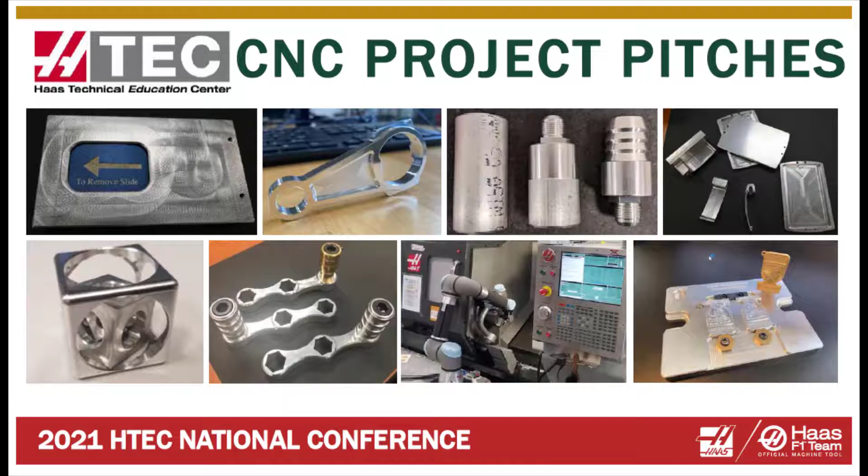This year, the HTEC Council has created a brand new CNC project session. Since we're virtual, we've converted our poster project session into a virtual elevator pitch project session. So join me over the next 35 minutes in watching 9 different projects that our CNC educators from around the country have submitted to showcase to you. Now, the cool part is everybody who's submitted a project is willing to share their material with you if you would like to use a part of the project in your classes on teaching Haas CNC machining.

So the format of this is random order. I pretty much took all 9 videos and inserted them in random order. At the beginning of every presentation, there's going to be a title and who's actually presenting. The educators have been asked to provide their contact information at the end of their presentation so you can contact them if you're interested in learning more about their projects. So let's check out these 9 exciting projects. Here we go.

Hi, my name is Antonio Espinoza, and I'm going to talk to you about the speed handles that we did on the CNC mill. These handles are used for a vise, either on a manual or on a CNC mill. The software we used for this was Fusion 360. This was my first time using this software, but my professor provided us with YouTube videos on how to make basic drawings or basic dimensions, and this wasn't that hard.

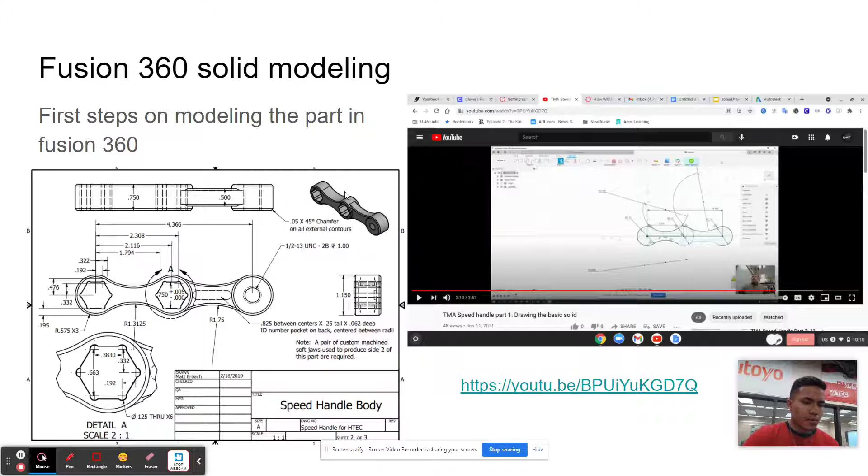So we each had different tool paths, meaning that we each had a different start and a different finish in order for us to have a different and unique code. For example, I could have started making my holes first on my part. Someone else could have started shaving off excess material.

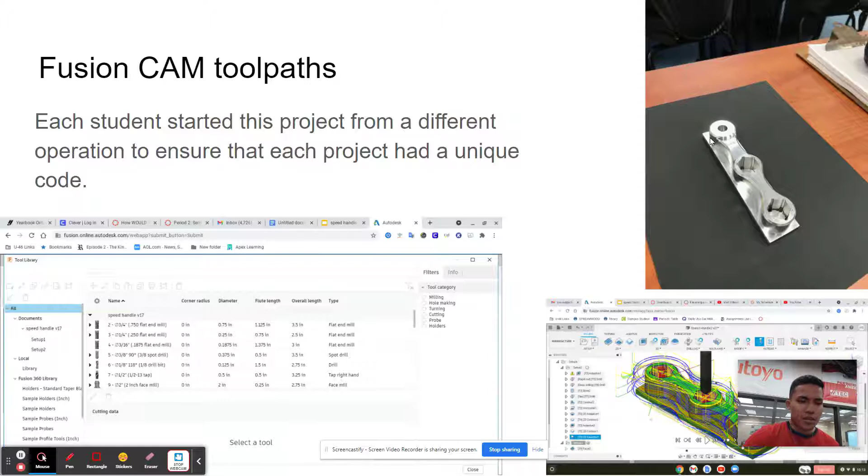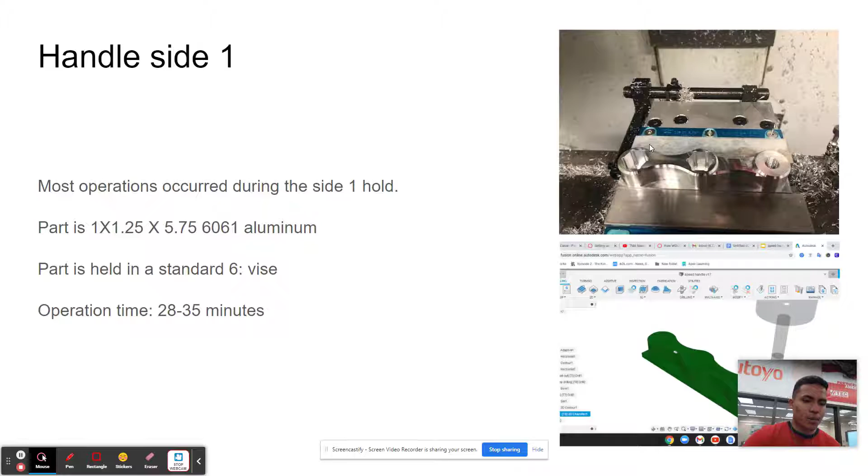So for handle side one, we took off most of the material in one shot, holding on by the vise. Usually it took us about half an hour to get the side done. For side two, we had the part flipped and it was held by these soft jaws, which were made by the first 2 people that finished the project. This only took about 7 minutes because it was just facing down the excess material at the bottom of the part.

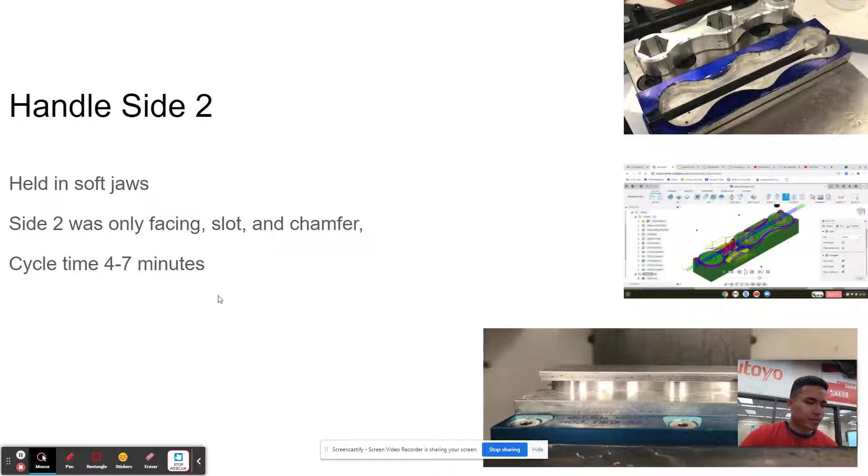Hi, my name is Michael Grader. I also helped with the project. We used all 4 tool slots on the CNC machine to help make some CNC cranks. This is a crank I designed in Fusion for how we made things. This is just the basic crank for competition and all that we use.

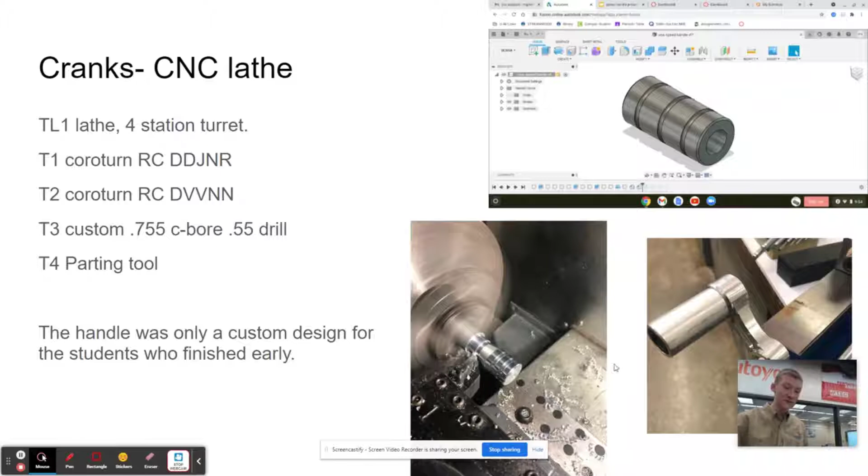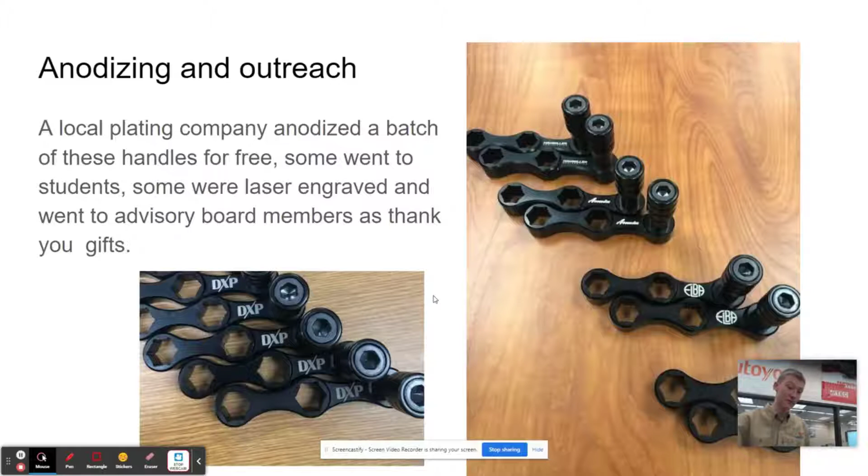We then anodized some of these cranks and handed them out to our advisory board members as a thank you, because some companies help supply us for the school. We used a bunch of materials for the tool slots in the CNC machine that we changed. We used screws, hex keys, tightening and all that.

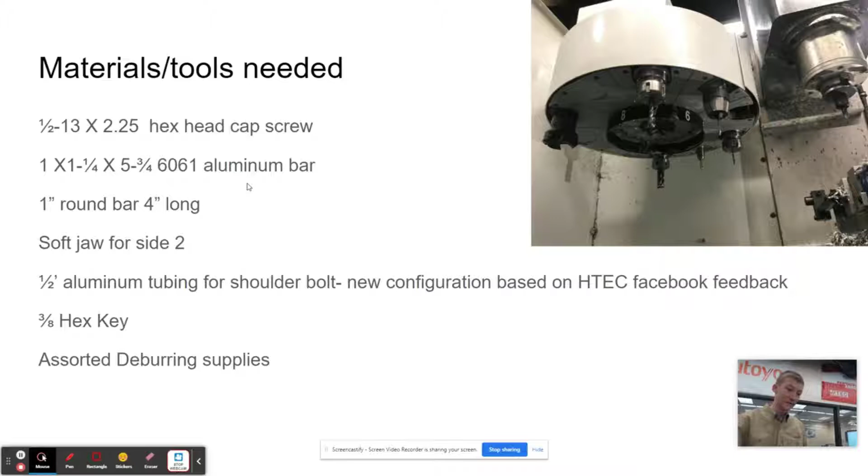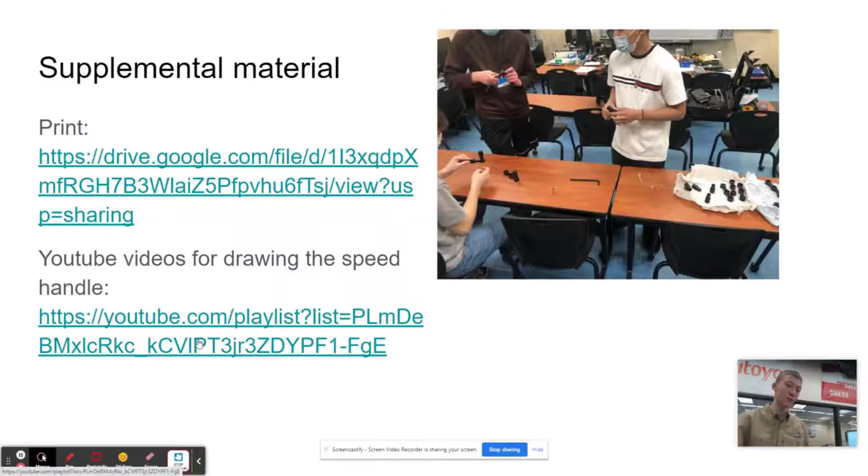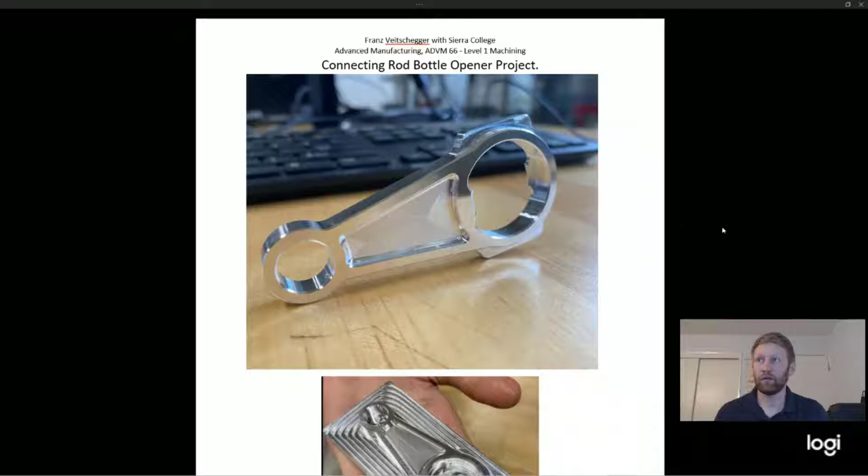Hello, my name is Franz Veitschegger. I'm with Sierra College in Rocklin, California. This is Advanced Manufacturing, Machining Level 1. There are no prereqs for this class. This is my connecting rod bottle opener project. This is the finished project, and let's hop into it.

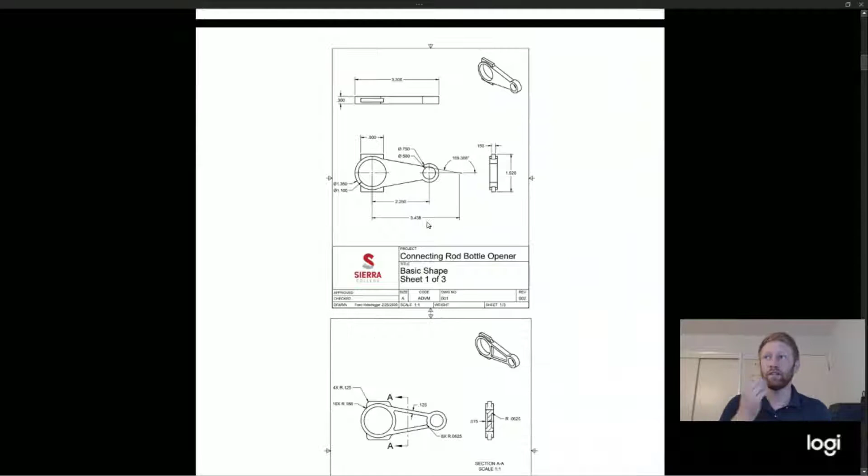So this is my lab at Sierra College. We have 9 Haas VF1s, very fortunate. I provide the students prints. The print is broken down into 3 prints to make it a little bit easier for these entry-level students to understand what is going on. With each print, I also provide a screencast video link. It goes through, I reference my prints, and then I show them how to model it inside of Fusion to help them when they are not in the classroom. And this is just a link to the screencast video.

This is the modeled connecting rod. This is a CAD inside of Fusion. Again, it's entry level, so I kind of spoon feed them how to set this up in CAM. So I created all these instructions in Word docs. I did all screenshots of how to create it, and examples of the tool path after you've completed it.

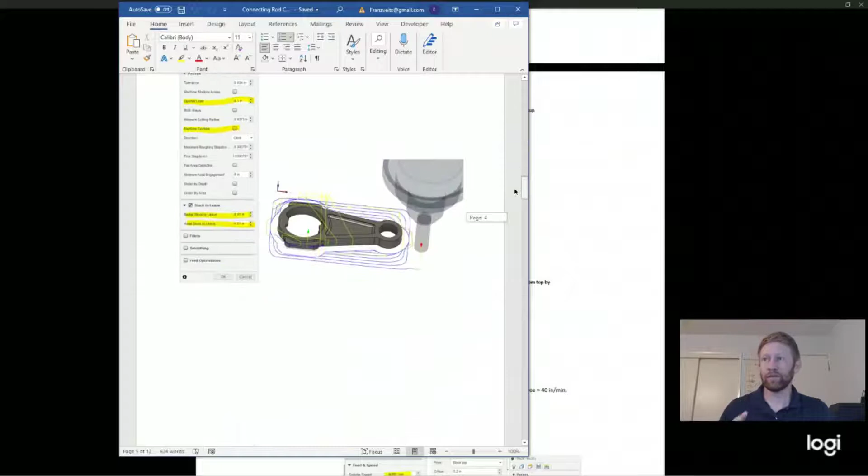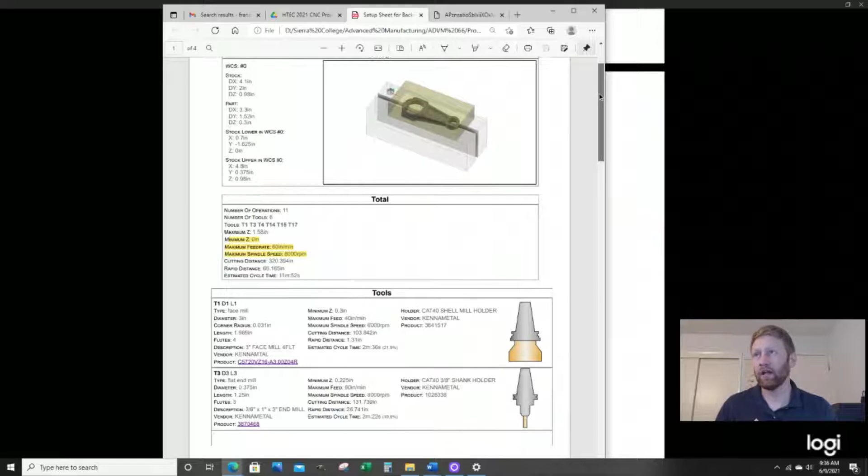And my saving grace in this class is after they've completed the tool path, I have them create a setup sheet again in Fusion 360. In this setup sheet, I have the important parameters. So Z minimum, max RPM, max feed rate, which has just saved me a ton. And so the students will go through and they'll verify operation by operation to my master copy, which is what you see right here. And if there's any problems, they bring it to class and we fix it in class. So here we go. Let's go.

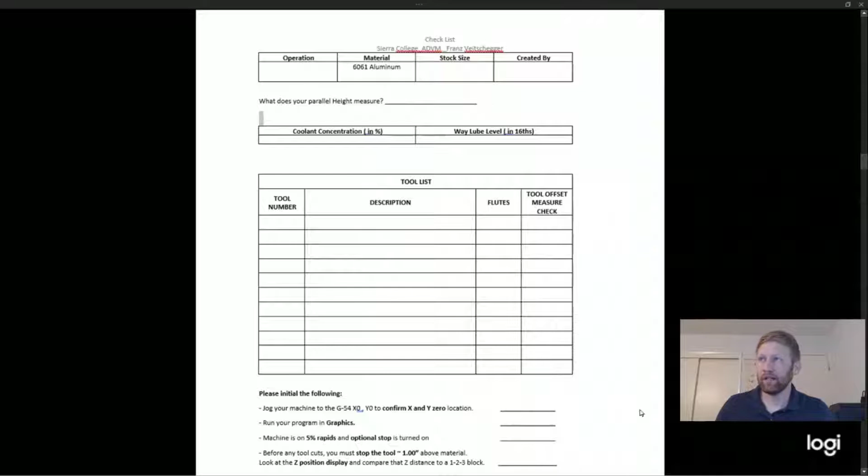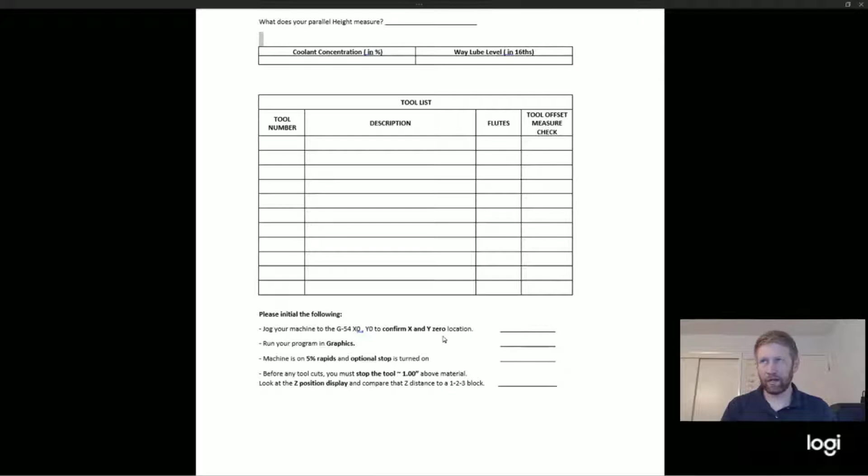So before they run the machine, I have these checklists, and so they even look at the coolant concentration, way lube level. They got to check their stock size, write down their tool numbers, do a quick description, verify their XY location, 5%, coolant off, let the cutter engage in the material before they let the coolant rip so they can make sure they're in the right location.

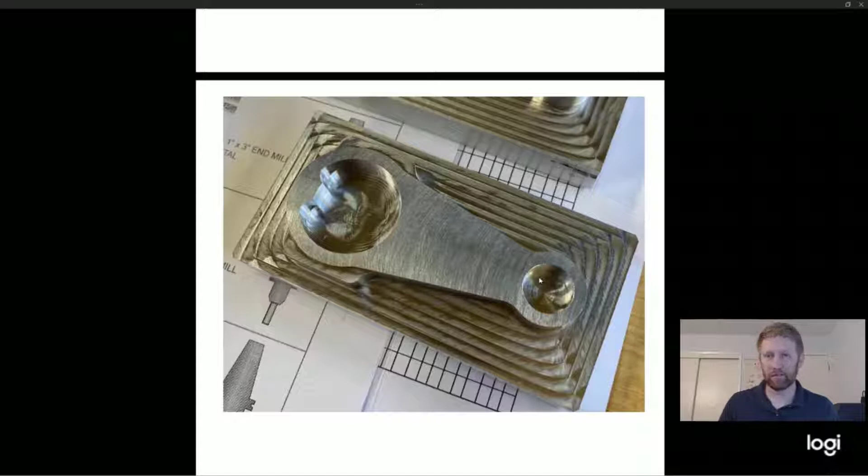This is roughed out. This is the very first one. So they first use that corner, and then, oopsie, we machined that corner away. So then we come back to class and lab the next week. The only finished part was that bore. So then we got to figure out, we got to use our mechanical edge finder, locate that bore, or an indicator, locate that bore, move our WCS inside Fusion, and then finish the detail inside of here. So that's real neat. Here we go.

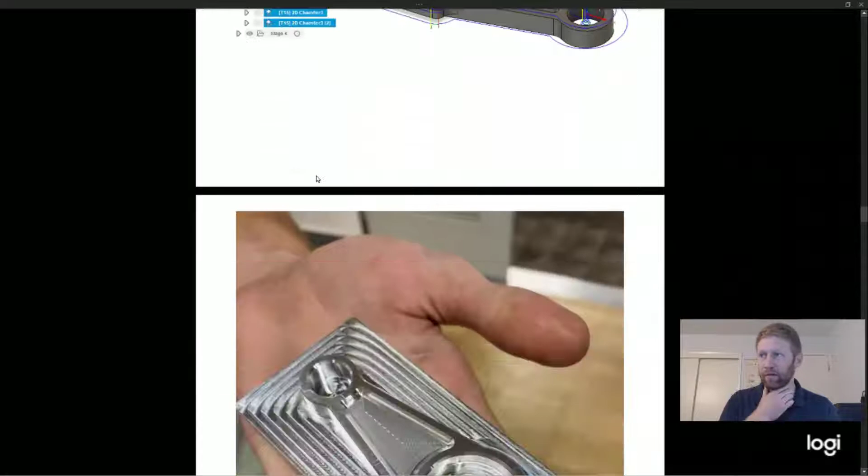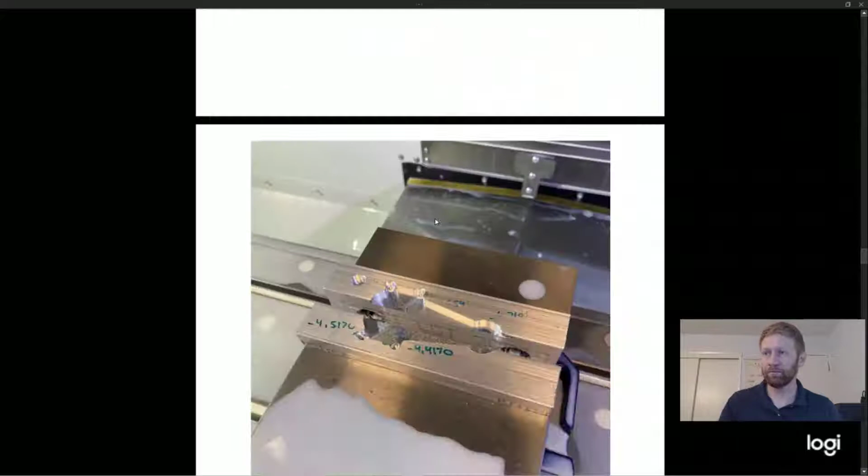That's just inside Fusion, the CAM environment, tool paths. They post the tool paths they want to post. This is the finished top side of one. So then how the heck do we machine the back side of this thing? Because we have a square and we have this weird shape. So we show them how to, inside Fusion, create soft jaws using the part geometry to project onto the soft jaws, cut, create them, machine them. We use these as our multi-use soft jaws. These are machined in class, students, I mean, there we go.

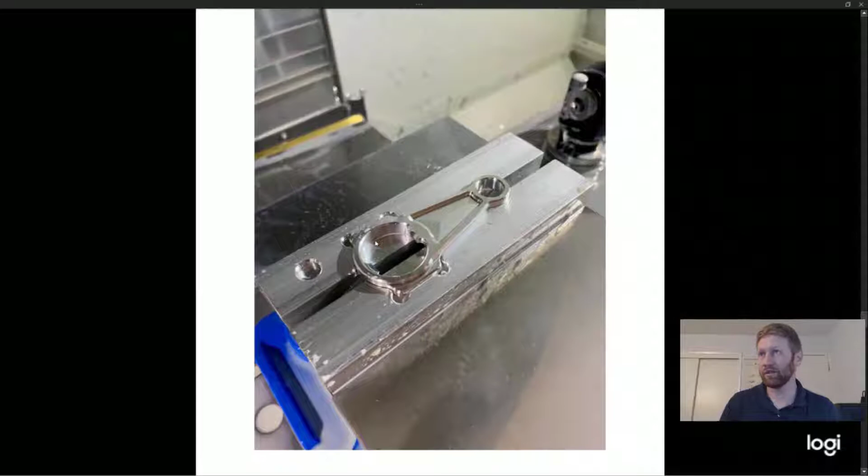So we also model it, use the joints, put them together. Our known location is right here. So we touch off there. Our Z is the bottom of the pocket. This is a finished part from a student. Again, all these are student parts. Student part, oh wait, we're not done.

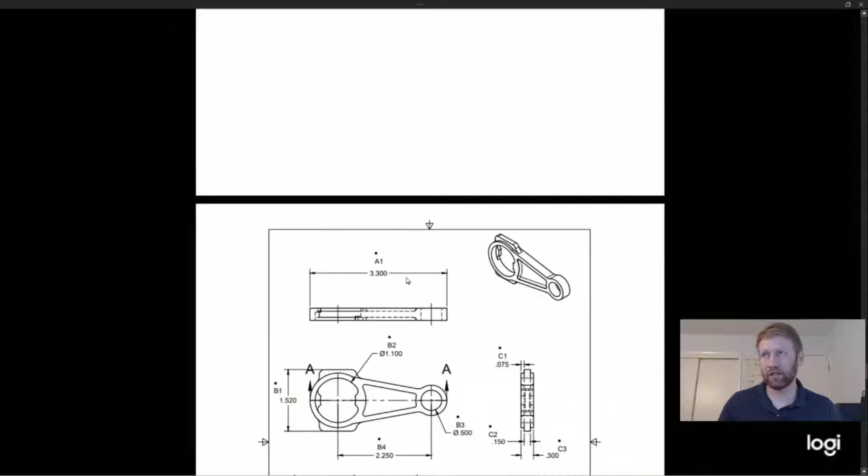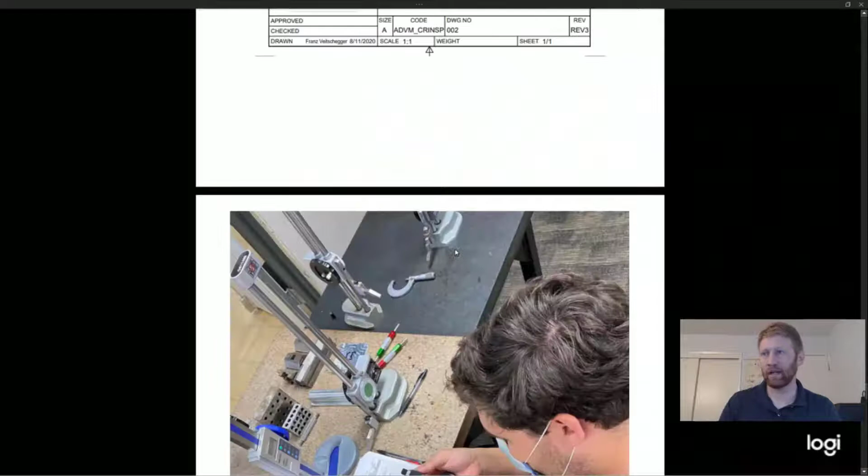We have inspection. So at the end, I have a Form 3. I created this document. I have these reference numbers, a characteristics number, and they measure them. And I kind of tell them what tooling or instruments to use, height gauge, mics, gauge blocks, gauge pins. And they go through, they inspect the part, they see how good or bad they are, and it's an awesome project. Students really like it. They can connect from what they're doing in class to the real world because they walk away with this little kind of a keychain bottle opener.

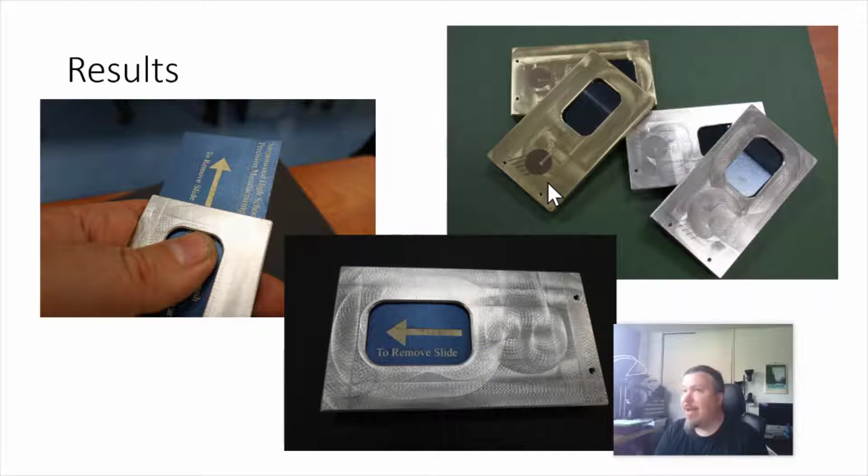We did actually in 2018 hand off some of these with the Gene Haas Foundation logos to the Haas Foundation just as a thank you, because they got our back. We might as well give them some neat stuff when we make it. We started this in 2018, carried it over to 19, and then 2020 we were supposed to do it, but obviously COVID got in the way.

Village of Streamwood runs this, and basically the idea is we take over the whole shop, we run all the equipment, and try to do a production run of something. Most students only do individual projects, so it's kind of fun to get them to think outside the box a little bit when we have to consider making many of something.

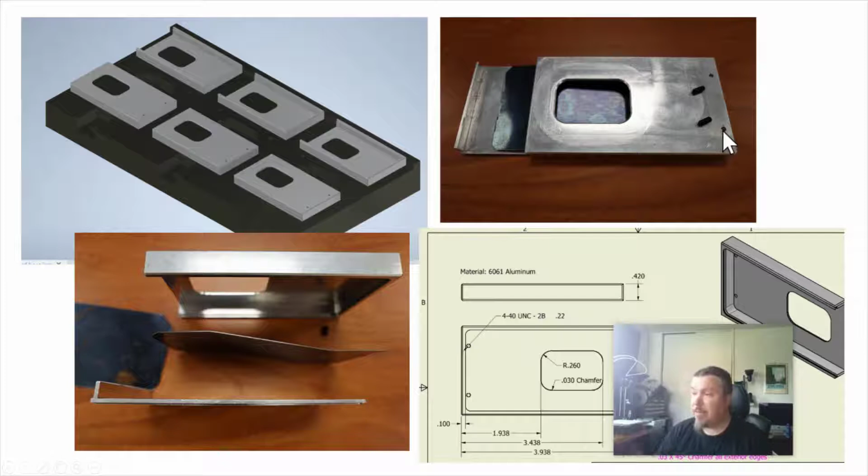There's 3 parts. 2 of them are billet aluminum, and then there's a piece of spring steel that gets just a simple shape applied to it, and then 2 screws go through there, obviously through these holes, and pinch the whole thing together, hold it in place. Pretty simple, pretty elegant. It actually works quite well.

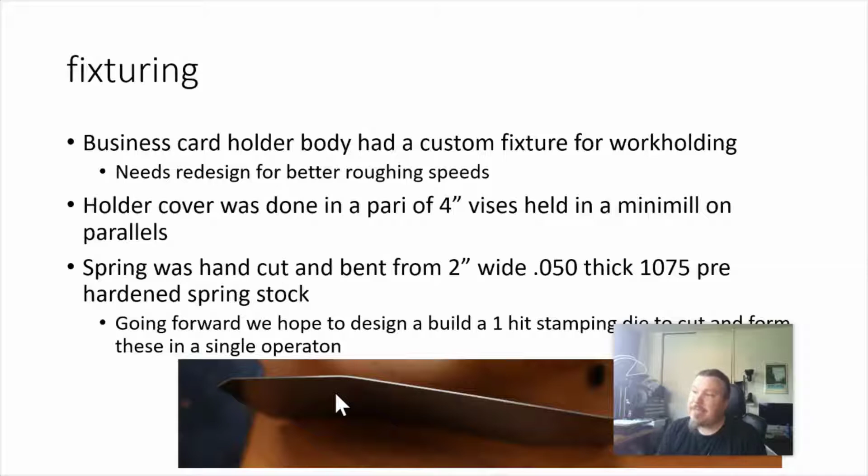The fixturing, it was all multi, all like Mitee-Bite type fixtures. You've got the spring here. We're hoping to, as part of process improvement, create a one-hit stamping die so that we can actually just make these things in an automated capacity instead of shaping them by hand.

And then it's also our hope to possibly anodize these so that when we do the laser engraving, obviously it pops a little bit better. And then there's Real World Scholars and Harbor Freight Ed Corp, and we're looking to maybe tie in with those and maybe sell some as well. None of this is official. Obviously, we need to get back in the swing of live students before we can take on this project again.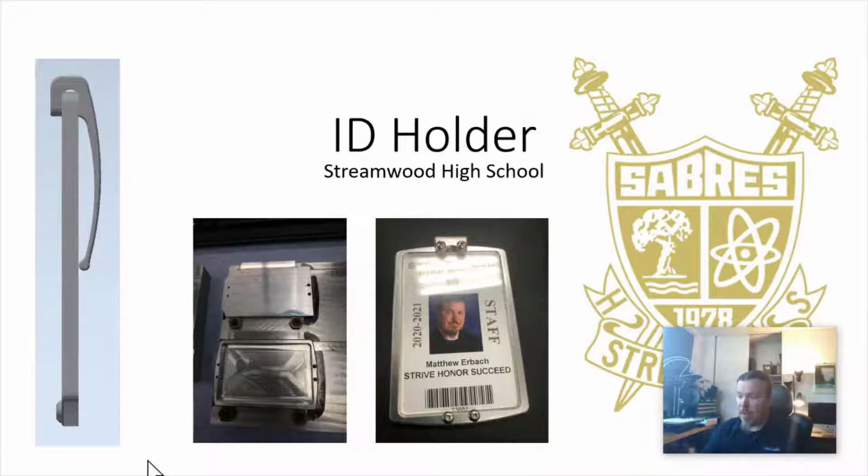Morning, ladies and gentlemen. My name is Matt Erbach. I'm presenting the Streamwood High School ID holder. The idea is pretty simple. We incorporated this idea in the senior class, designing the tooling, the fixturing, the processes, the CAD, the CAM, and it's intended to be used in the lowest level students, so my freshmen and my sophomores.

The idea is it's a turnkey, ready platform so that the students won't have to get into the specifics of like touching off tools. They can do this very, very early in their school experience, so they might not have a lot of skills yet as a freshman, but they can still hit the cycle start and monitor a job and load and unload and things like that, and produce something that looks pretty good that will serve two purposes.

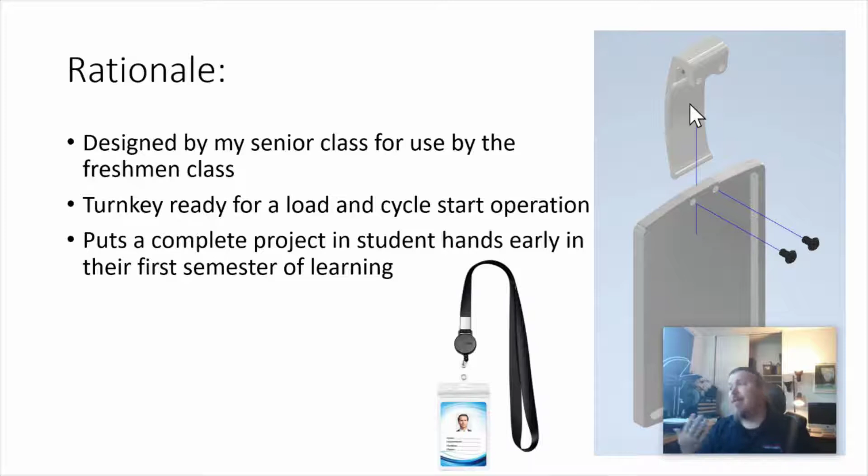Number one, it'll help promote the program, and number two, everyone in my school is required to wear their ID on them at all times. So they've got these typical traditional lanyards with the ID hanging underneath, and they're a huge safety hazard in the shop. So the advantage with this being equipped with a belt clip means that the students can clip it to like the pocket of their jeans, and they're still meeting the district expectation of wearing their ID, but it's not around their neck where they're potentially going to hazard themselves.

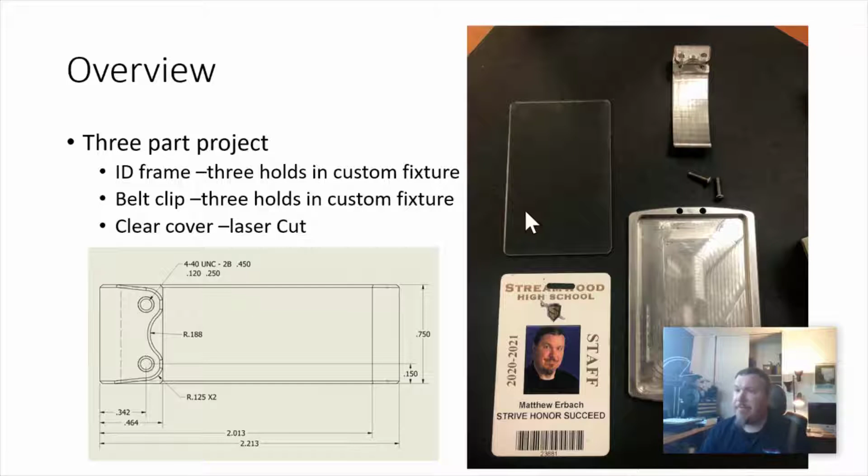Three parts. You got the clip here, and you've got the body of the ID holder, some screws, and then the acrylic needs to be either laser cut or run on like a table saw, and then just corners radiused to fit, filleted to fit. So I did this with my seniors, and they did the tooling, the CAD, the CAM, pretty much as we could possibly arrange. So you can see here that what we've got is multiple holds.

Hold one is up here. I didn't have much room for it. Takes a 3-inch bar down to size on the edges and does as much of the drilling and tapping ops as you can. Hold 2 obviously locates on a couple of fixtures here, little Mitee-Bite holders here, and that gives you all your corners rounded down and your big internal pocket done. And then hold 3 is just essentially a backside chamfer.

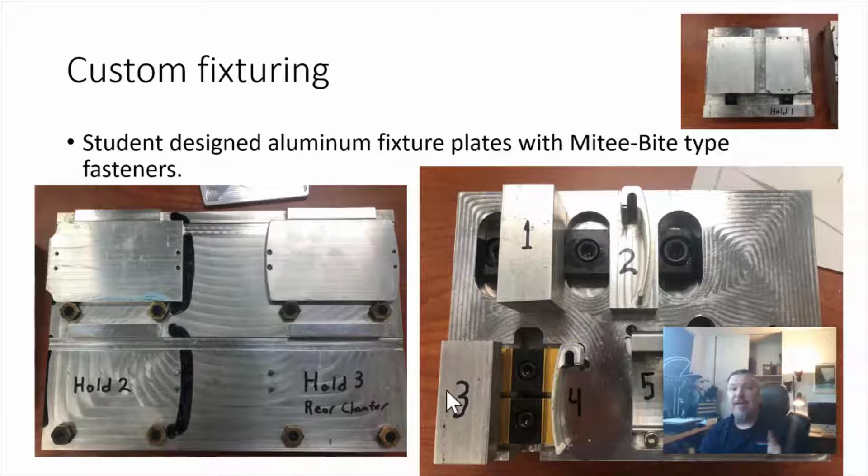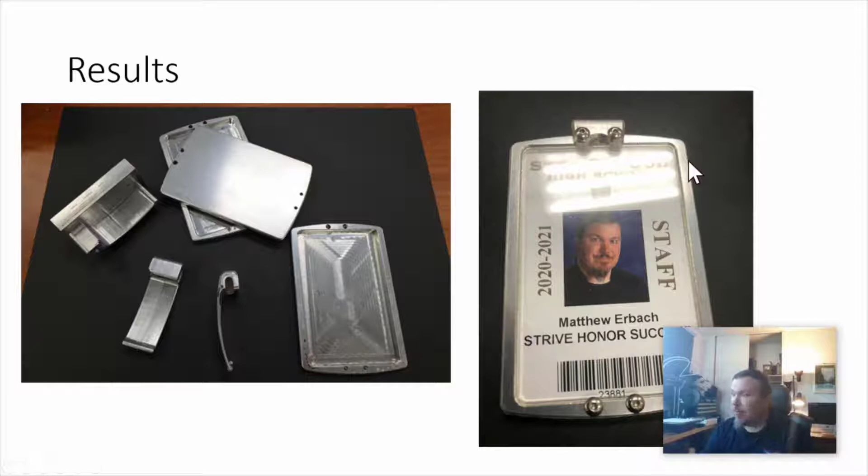And then you can see here we've got a similar multi-stage process. You'll notice that everything's going in pairs. It's going in pairs because I want the student to produce one for themselves, and then I get one as well to hand out to a staffer at the end of this. You can see here the results. Obviously, this is a completed ID holder. My apologies, that was the only photo I had available. But you can see some of the parts here the students have produced.

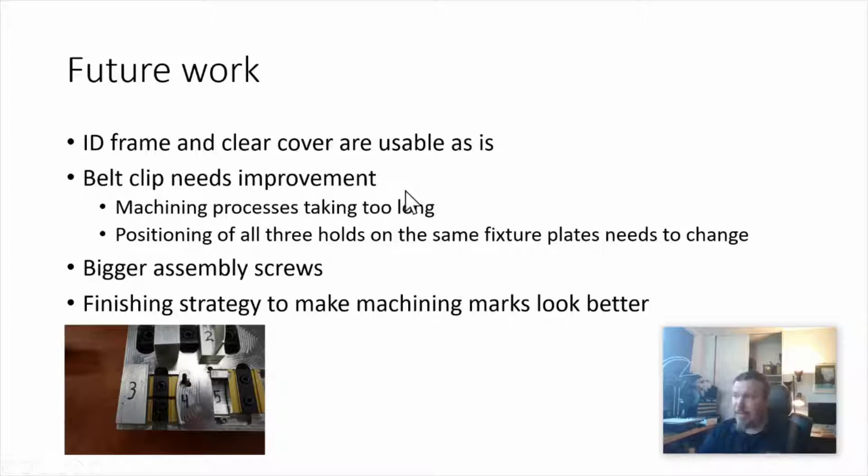Your materials list. Future work. The assembly screws are currently 4-40s. I want to go bigger. I want to tweak the belt clip a little bit. It's not quite as good as it should be. It's a little bit too rigid, so it's very difficult to clip into your pants. And that's basically what's got going on.

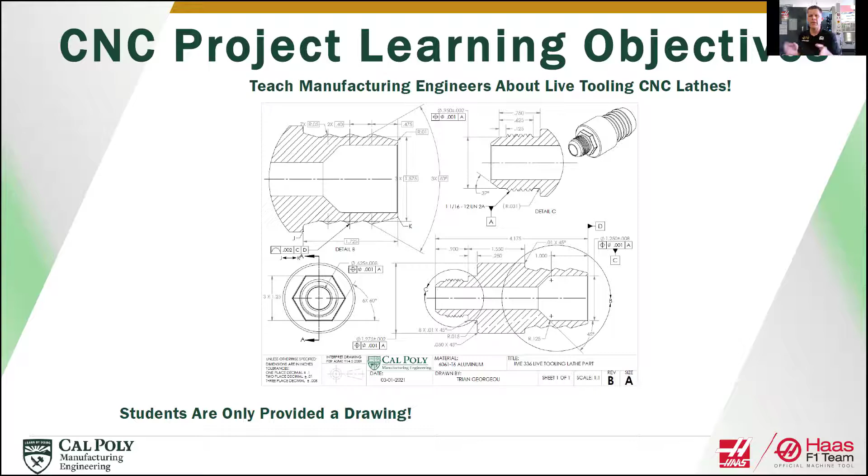Now, the other side has an AN fitting and a large bore where the students are basically learning how to use boring bars for the first time in this project. Now the students are only given this engineering drawing like you see right here. From that engineering drawing, they have to figure out how they're going to produce that part through all the different operations. They have to figure out how they go from raw stock to finished part.

So as a class, we do some production planning, and we come up with a stock size of like 2 inch by 4 1/4. We figure out how we're going to hold it. So in this case, we're using a 1.975 bore soft jaw that's 1.375 deep, and it holds both operations in that same soft jaw, as you can see right there.

So for that first CNC operation, they used Fusion 360 in this project. They used both Mastercam and Fusion 360 in this course. So this one was a Fusion 360 project where they machined that -12 AN fitting all the way up to the back of that 1.975 diameter. So they learned facing, turning, threading, spot drilling, and axial live tooling.

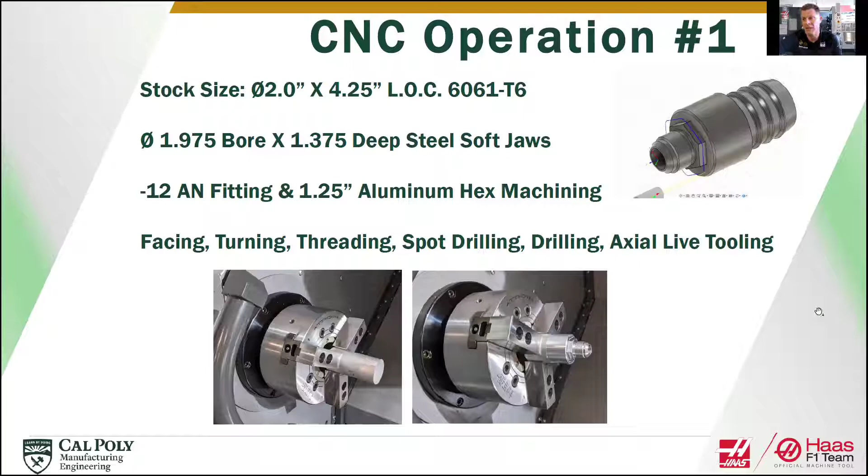And we ended up chamfering that part with a 3/8 inch bull nose end mill, and did a little 3-axis machining. Now, thanks to Tim Paul from Autodesk for coming up with that idea.

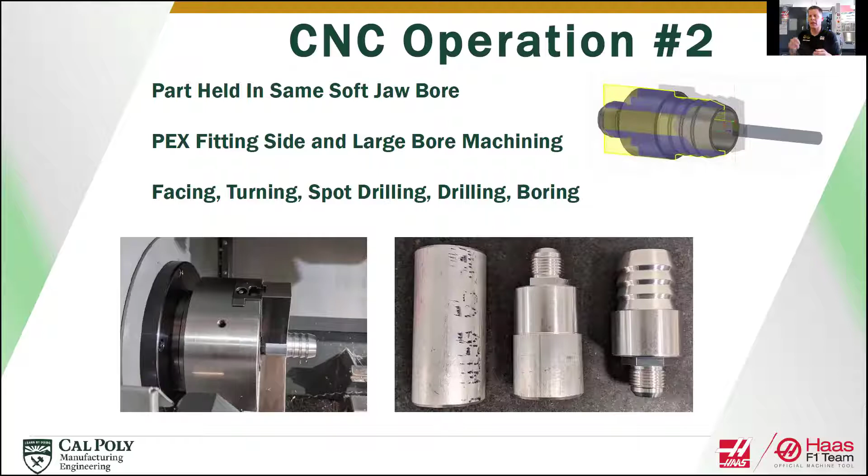Now, the part is going to be held in the same soft jaw bore for the second operation. So they machine that PEX fitting side, and then they do the large bore machining for that second operation. And so they're facing, turning, spot drilling, and boring. The reason we had to drill twice is we don't have enough Z right there. We had to get a stub drill.

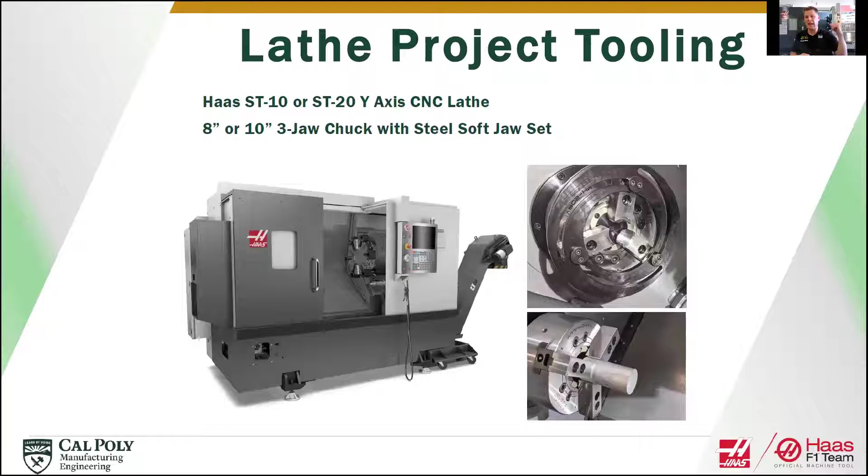So to machine this part, we needed a soft jaw set. It can be done in an 8-inch or 10-inch 3-jaw chuck. Mine actually happens to be a 10-inch 3-jaw chuck. So I have an ST20Y with the BMT turret right here. So you can see that behind me.

And in terms of cutting tools for this project, you can get it done with a CNMG, a VNMG, and then some sort of OD threading tool to do that 1 1/16 inch -12 thread. You need a 3/4 inch, 120-degree spot drill, a high-speed steel 5/8 inch stub drill, a small boring bar, and a 3/8 inch bull end mill with a 15 thou radius.

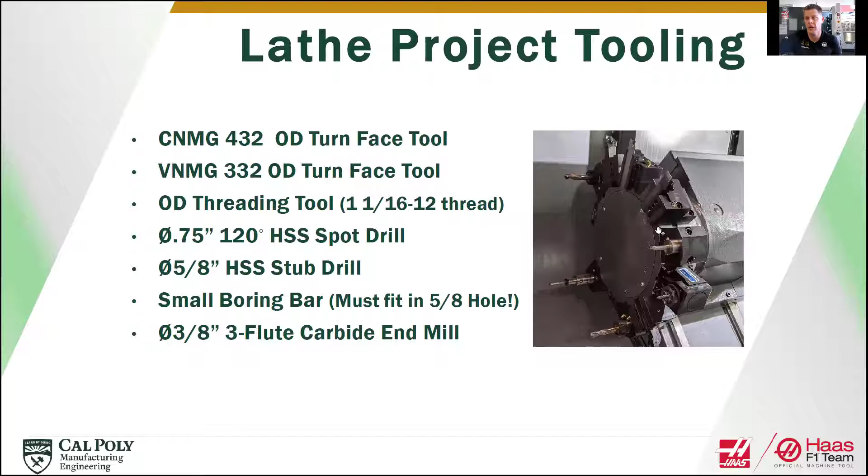Now, the students go from solid model to finished part just from an engineering drawing. And at the end, they use the metrology lab to validate their process. So they measure the part using the optical comparator to validate that they machined that PEX fitting correctly.

The Turner's Cube project has been around for a long time. We're using a 5-axis. We're doing this with 3+2 machining, manual G and M coding, speeds, and canned cycles, of course, multi-fixture offsets, subroutines, and CAD/CAM programming. We're actually doing the project twice. On the first project we do 2 orders of operations. We cut 5 sides in the first op and then finish the sixth side on op 2.

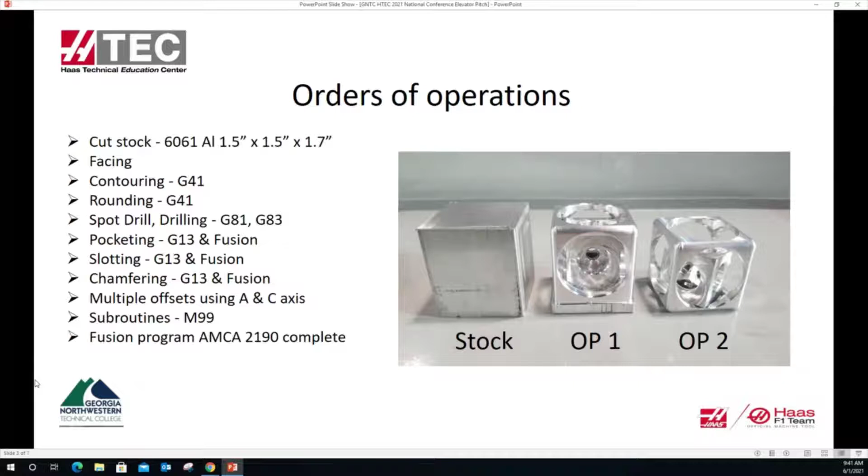With all the parts and pieces there, we manually G-code for cutter comps and rounding and some of the other parts of the project, and later go back and program it complete with Fusion. Students will learn a lot of other things in there, subroutines and manipulating the code and that sort of thing. On op 1, they get a drawing like so, and they will actually generate this drawing in class. So finish top 5 sides complete, you see that?

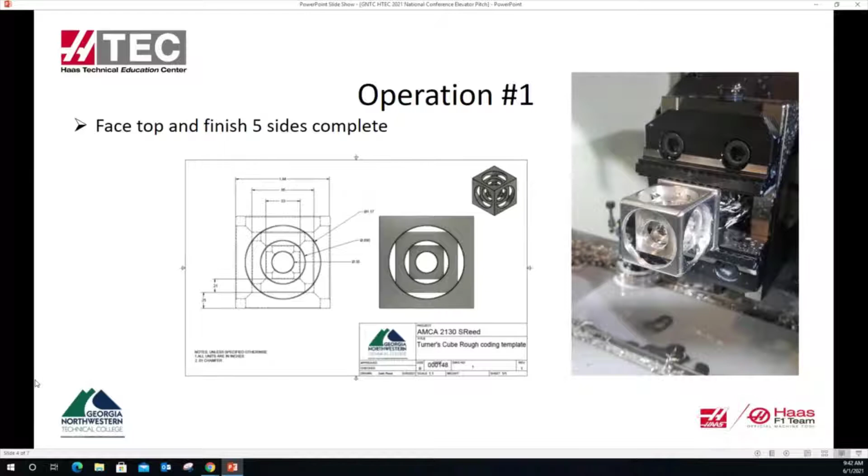That's as it's finished using A and C axis, and then on operation 2, they'll finish the 6th side, and you'll have to use spacers in this, and we'll show you right here the total machine time not to exceed 16 minutes and 45 seconds. So obviously speeds and feeds are important, and not forgetting anything, of course.

We also do something different. We use a small Woodruff key cutter, slot cutter, to cut the corners and relieve the corners, so that when we cut the block on the 6th side, the last op, the cubes will all be free when they leave. That's why we need the spacers to keep them from bouncing around.

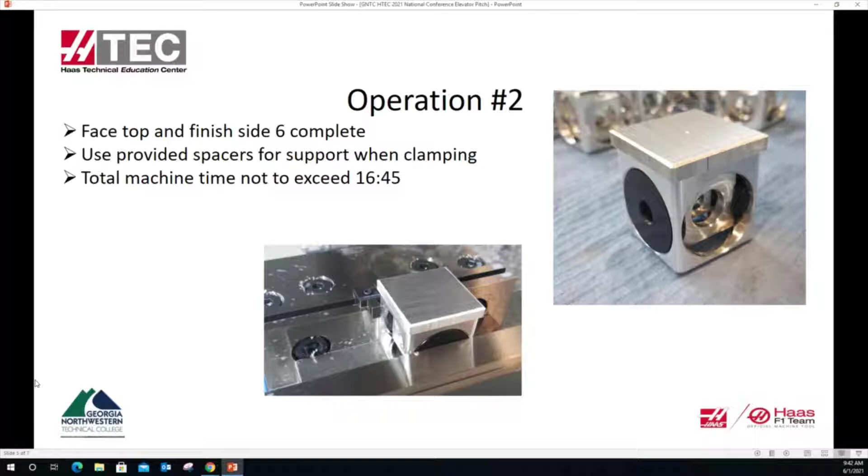And if you don't use the spacer, Mr. Bill says, I won't do it. But if you get this joke, you're probably old.

So anyway, there's the finished cube.

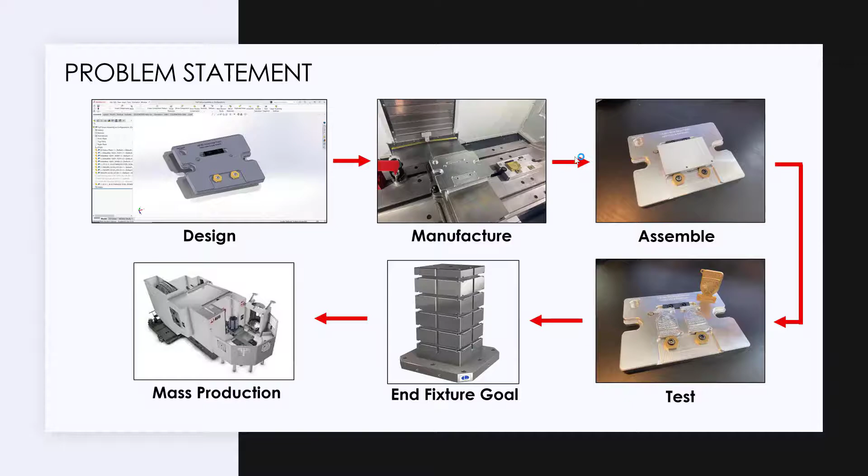The overall goal is to multiply this fixture and scale up mass production of many keychain parts on multiple tombstones in the pallet pool of the horizontal mill. Design constraints and criteria for this fixture design consist of a few main things. If achieved at a minimum and ideally exceeded, the design of the fixture should be successful. This includes producing 2 finished keychain parts and the clamping forces of the fixture withstanding the tooling forces with a minimum safety factor of 2.0.

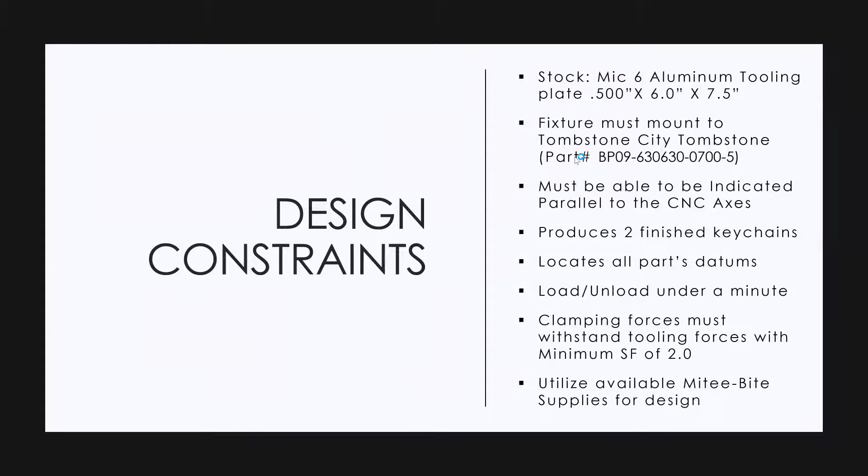To meet the design constraints mentioned by Adam, we locate our part face down on the tooling plate, butted up against a 2-inch Mitee-Bite locating rail, and lastly pressed to a 0.375-inch dowel pin. The part is securely clamped against the B datum with 2 800-pound Mitee-Bite clamps, which are centered on the individual keychains. A WCS bore is in the top left to be conveniently probed, and a 0.25-inch poka-yoke dowel pin was added to prevent improper loading.

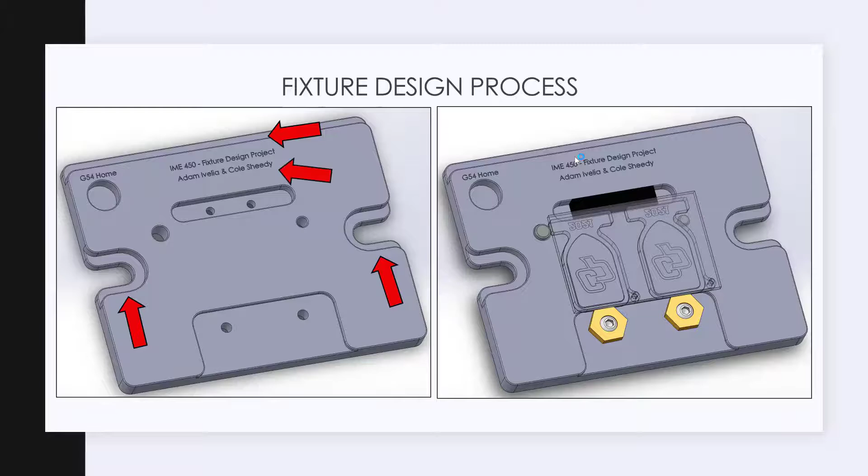The last features present are a square indicating band, 2 T-bracket bolt holes with excessive counterbore relief to mount the fixture, some cosmetic engraving, and chamfering for comfort.

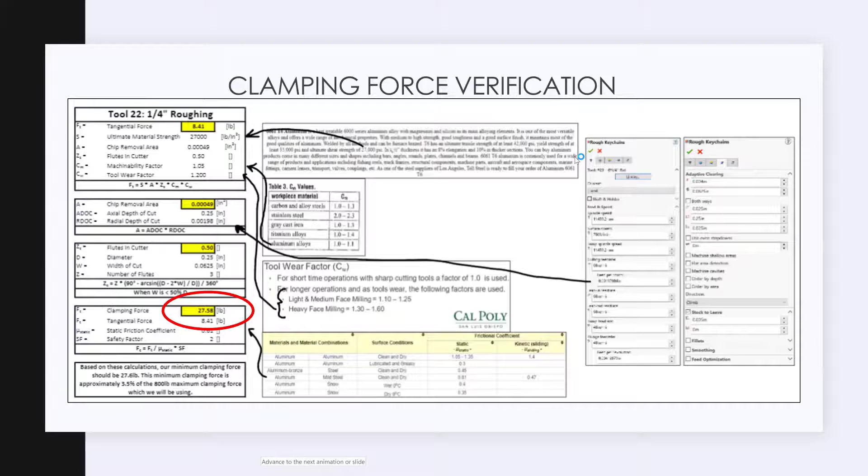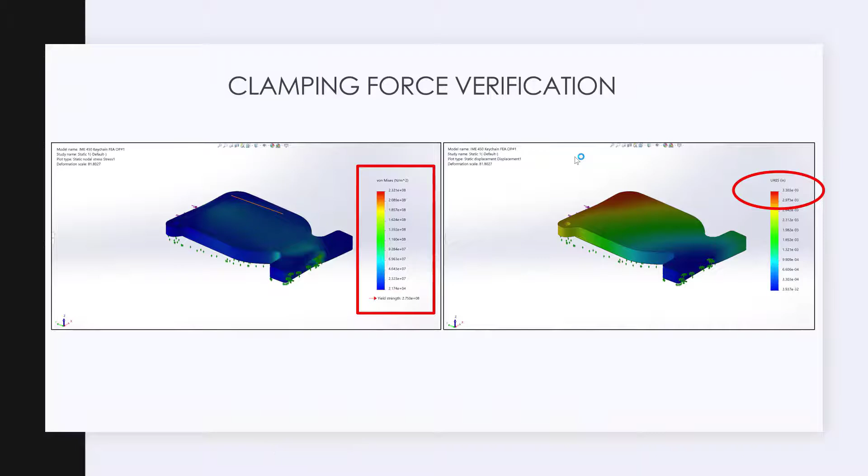To ensure our keychain parts would not throw during milling, we found that we needed a minimum of 28 pounds of clamping force when roughing with the 1/4-inch end mill and 40 pounds during the face milling operation. To verify our keychains would not deform, we conducted a finite element analysis to find an approximate deformation of 3 thou at the 800-pound maximum clamping force, along with a passing von Mises stress. The deformation amount we found was insignificant and unnoticeable.

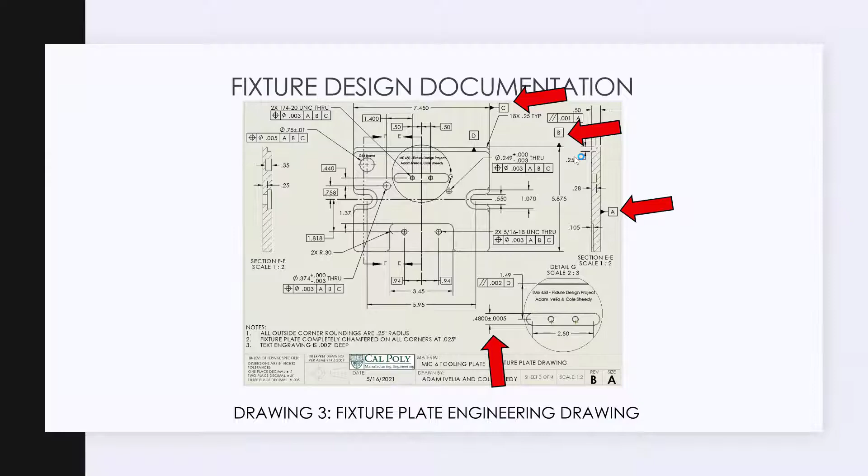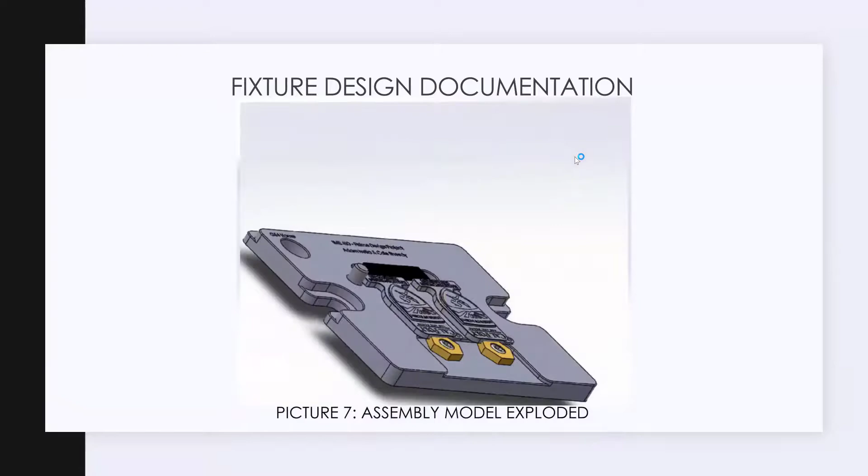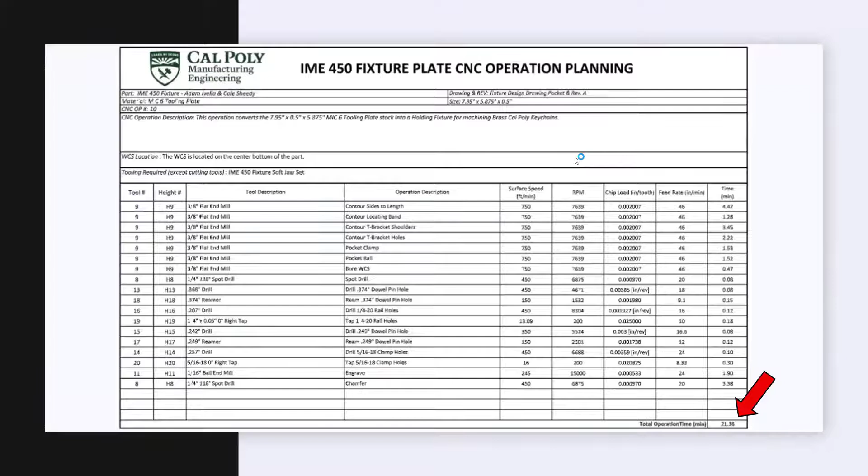Our operation planning document is presented above. We used a WCS of the bottom center of the stock and utilized the pre-made tooling library to design our CAM, obtaining an approximate operating time of 22 minutes, which we'll conservatively call 40 minutes. This operation simulation shows contouring of the sides and locating band, pocketing of the clamp relief, rail slot, and WCS, spot drilling, reaming, and tapping. Believe it or not, reaming before drilling will break a tool, so don't learn by doing that. Lastly, we engraved and chamfered.

In conclusion, why should you go with us? Our fixture design is successful in many ways, meeting all design criteria. However, places it exceeds are with the load-unload time being well under a minute with simply using a torque wrench. Furthermore, our extremely ergonomic design includes features such as the poka-yoke dowel pin, easy to understand datum locating features, and the G54 probing bore. The design is cost-effective and easily machinable with carefully selected supplies that are available and as inexpensive as possible. No features are redundant. It is extremely user-friendly and allows for the creation of many parts effectively. Lastly, the overall goal of producing quality parts to spec is met and verified with great assurance.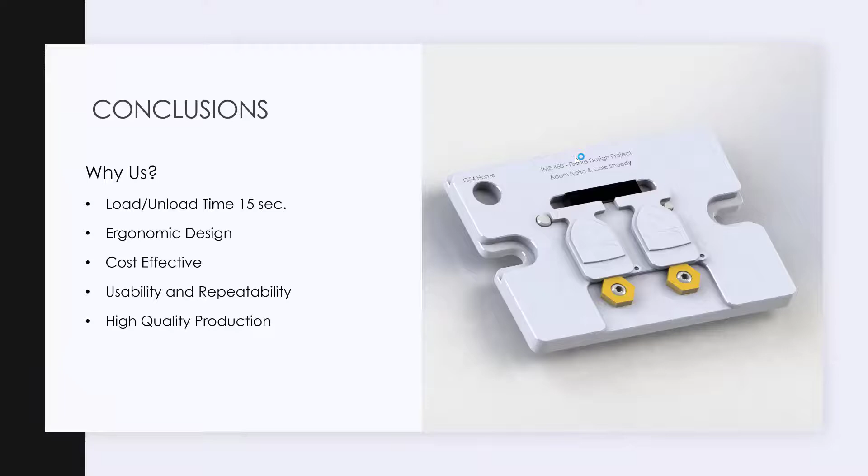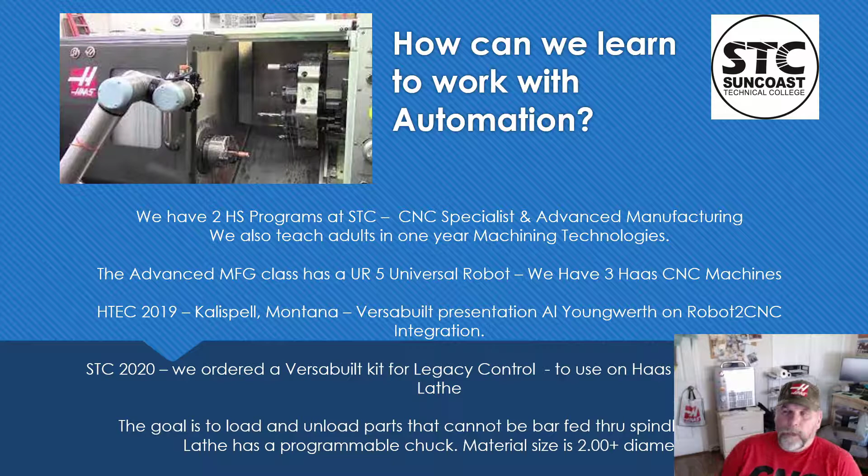We're talking about automation, Haas CNC lathes, and UR robot collaboration, loading and unloading. How can we learn to work with automation? We have 2 high school programs here at STC. In my classroom is a CNC specialist, and next door is advanced manufacturing. We also teach adults in our 1-year machining technologies program, which is also me teaching that one. In advanced manufacturing, they have a UR5 universal robot, and they've had it for a couple of years, and we have 3 Haas CNC machines, a VF2, a TM1P, and a ST10 lathe.

HTEC 2019, I attended the conference in Kalispell, Montana at Flathead Valley Community College. VersaBuilt did a presentation. Al Youngwerth from that company talked about robot to CNC integration. When we got back, we decided to get the UR robot connected to our Haas machine. We bought a VersaBuilt kit with a legacy control. We also selected the lathe because it already had a programmable chuck, and we'd already seen some other videos that it was possible. Up in the upper left corner is one of the YouTube video clips we used to watch.

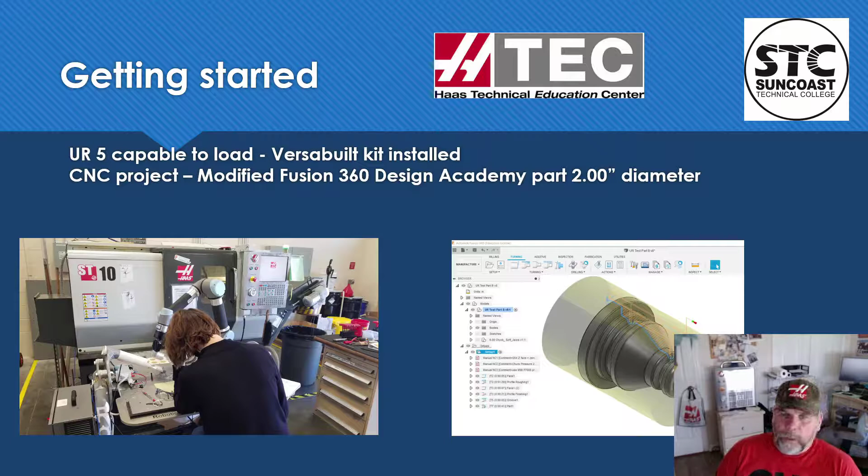We brought over the UR5 that was on a training platform already with a gripper. We figured out it was capable of loading and unloading. We installed the VersaBuilt kit, learned a lot there, and then we picked a CNC project. We did a modified Fusion 360 Design Academy course in the lathe area, and it was about 2 inches in diameter.

Okay, we got our high school students working in there. There's a lot of them going on to engineering or into manufacturing, but learning how to solve problems and actually make things at the same time.

This is our lathe part here. We have our setup sheet here. We cut soft jaws 2 inches diameter by .750 deep. The material was 2 inches diameter by 3 inch long. Typical roughing, finishing, grooving, and parting tool, but we did not part it off all the way as we wanted the robot to unload it. We did add a G72 cycle for some of the oversized lengths, and I'll talk about that a little later.

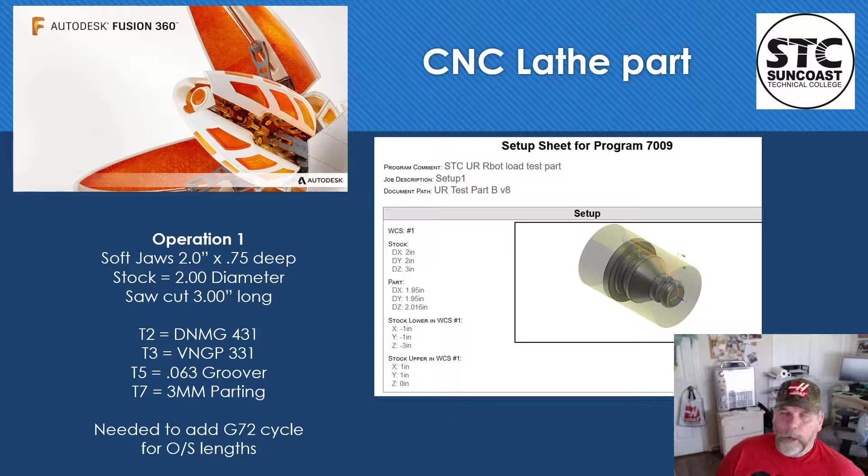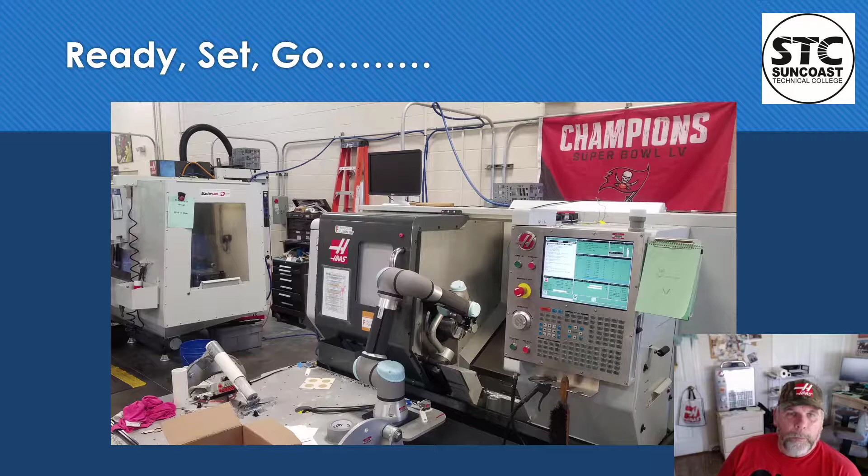All right, next would be, ready, set, go. Our Tampa Bay Buccaneer Championship flag in the back, but we did a couple of tests to make sure it actually worked loading, unloading, and load, make the part and unload. So in the end we had success. We used a little chute on the left that Tom had designed and could pick parts out of the chute, load them and unload them and just drop them in the box for a quick setup.

Unplanned was some of the material was oversized and wasn't loading quite correctly, and we were trying to machine off the face like a 1/4 inch, and one of the parts came flying out. So we added a G72 cycle to pre-machine, and we also added a spring-loaded plunger to have the turret push the parts in to make sure they were seated correctly. And also a look at the future for everybody. Even the full-time machinists could see what was coming down the road for machining.

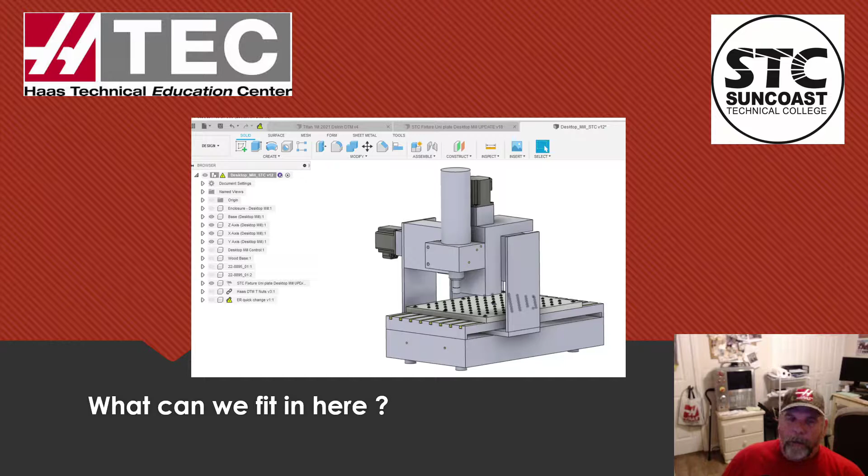But we do everything on the setups as far as manual setups. Okay, we did download the whole model into our Fusion, and I did that to see how much room we had. And I also designed a fixture plate, thinking of thin, long parts, and also anything you can put in a vise. We also got a couple of slim vises that were very narrow, and that worked out pretty well. We just added a couple more bolt holes through these two that we bought so they would line up with the T-slots in the table.

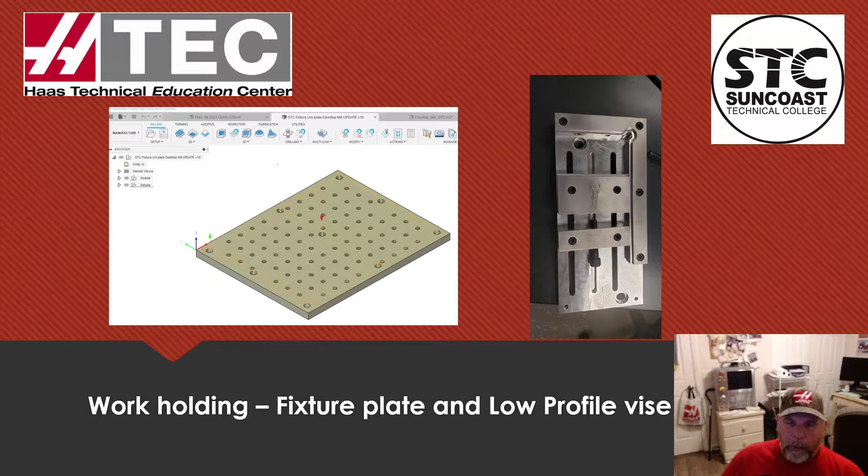Oh, also, you have to use 6mm T-nuts in these things. I tried to use 1/4 inch ones, and they don't quite fit. So, all right, we decided to do as a first project a Titan 1M made out of Delrin, and try to use one tool only, so we don't have to change anything. We do everything the same as Titan teaches us in his curriculum. We use Fusion 360, but you could use Mastercam. Really doesn't matter on this one.

Now on the Titan 1M, let me go back to the picture of the part. Of course, this vise was a little bit small. That long vise is actually in the VF2. I was testing it out before I brought it over, and I wanted to compare how each one cut. But in the DTM, the desktop mill, it's longer in Y than it is in X, so you just want to be aware of that. Personally, when I clamp on the vise, I like the vise handle to be facing me.

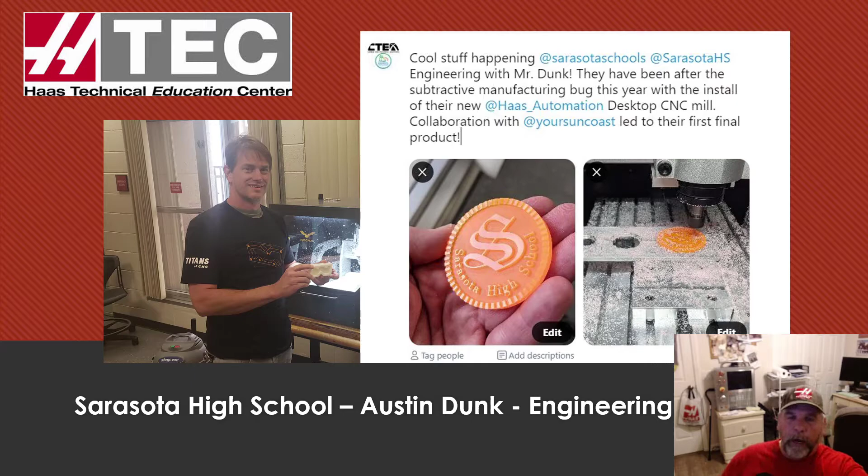Wow, those are some really interesting projects. In fact, I learned a thing or two that I'm going to take back into the classroom in the fall and implement into some of my projects. And I'm sure you did as well.